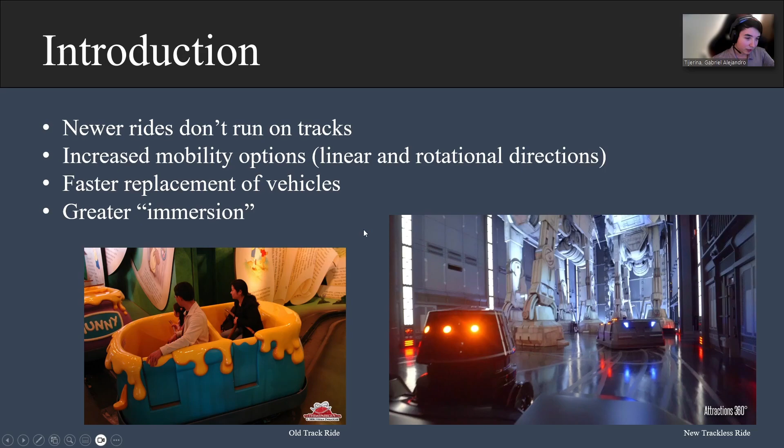On the right side, here's a new trackless ride. Cleanup is a lot easier. You can't see the physical track, so you kind of don't know exactly where you're going to go. Sure, there's tire marks, but they can go in and clean it at the end of every day, or every few hours actually. So on the bottom right, that's one of the newer Disney rides.

Have that same picture again because let's go ahead and analyze it. Flat floor, better for cleaning up, like I said. There's no railings or padding on the walls. Obviously, if there's a track, the vehicle isn't going to go off the track. But here, there needs to be some sort of really good control system so that it doesn't just go ramming into the nice decorations.

Oh, can I turn on my laser pointer?

Yeah, there we go. You don't want to run into any of this stuff because I'm sure they don't have big decorations like this just lying around as backups. Also, this kind of structure is very awkwardly shaped, so they're probably not using some sort of basic photo sensor because of all these jagged corners that would make the vehicle very jittery. So how are they doing that in such a tight space?

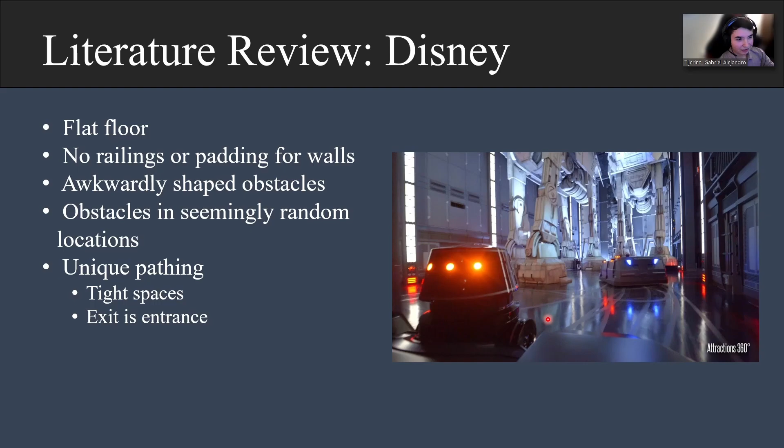And also in this picture, it's actually a screenshot from a video. There's actually no exit to this room. The exit is the same as the entrance. So that brings up more questions over how exactly this vehicle is built. So assumptions have to be made. I mean, as Disney, they're not just going to spoil all of their secrets.

So I've decided to assume that these vehicles use a holonomic drive chassis. You see a picture of it here on the left. That just means that there are four omni wheels, pointed inwards at 45-degree angles. This allows this vehicle to move in any direction, forward, left, right, any 360-degree direction, while also being able to rotate about its center, about its origin. So I started my research there.

Most of the research for this type of chassis ended up being in code, because I've never seen any other vehicle carrying passengers with this type of drive base. But as you can see here, it's mostly used for robots. So there's been a lot of code to power these four motors. That's where the majority of my answers were really.

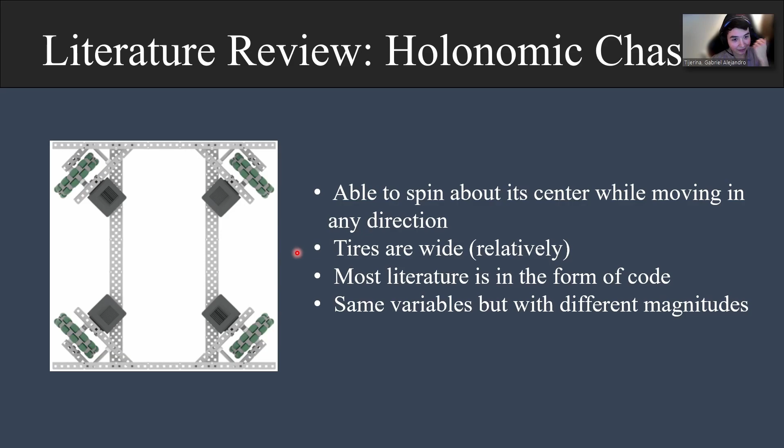At first I wanted to see how I could control a DC motor. So boom, I just looked it up. I found these equations. That's nice and all, but taking a further look at them, I'm trying to control motors that are attached to a vehicle. What parameters do I really want to control? The velocity or the position or acceleration? Looking at these equations, it has nothing to do with a vehicle. It's just for DC motors.

So do I want to have four separate control systems for each motor and then somehow combine all that to make another control system for the vehicle overall? These are the kind of things I had to ask myself from the very beginning. So I decided, I'm still in the research phase.

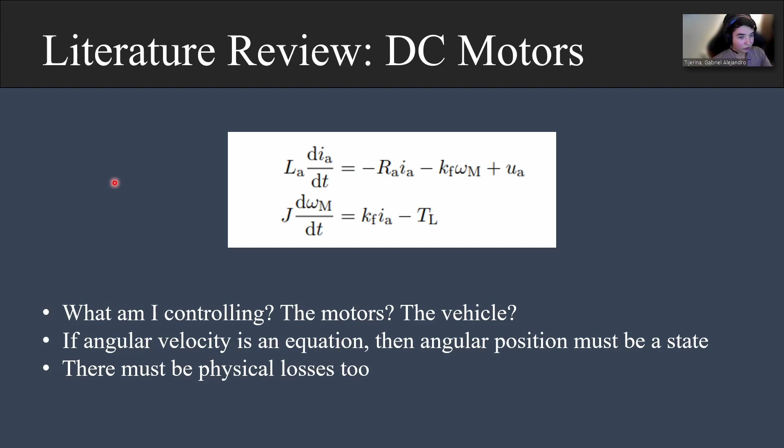Let's look at the dynamics for a car. There's no cars with the holonomic drive, but this gives me a good idea. This is a free body diagram of a car. Just very obvious forces driving the car. And then there's also resistance like wind.

Wind is pretty negligible. These Disney trackless ride vehicles are not outdoors. There's no wind. It's AC, but that's negligible. And they're not even traveling at very fast speeds. They have to travel very slow. They don't have doors. I guess you could just step right out, but you might get kicked out of the park, which no one wants.

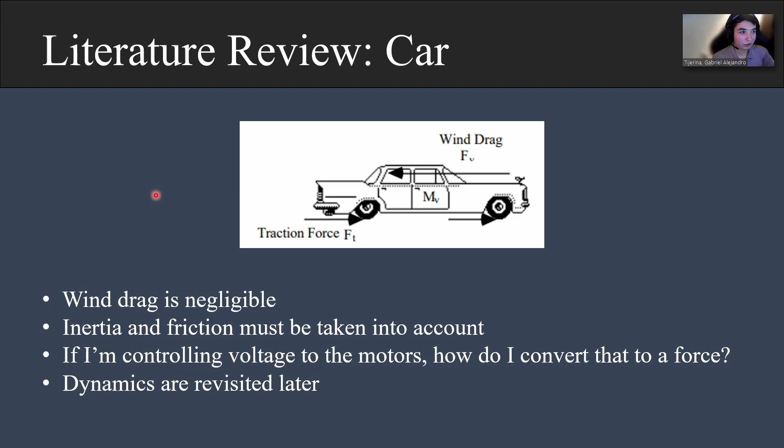So wind is negligible, but this did bring up other forces to keep in mind, like friction and inertia for sure, because on these rides, it's like a thrill ride. You're constantly being shoved left and right. So here we go. I just started coming up with something.

The code for the holonomic chassis wasn't super useful. So on the right here, you can see this geometry, trigonometry work that I did to derive these 4 equations. It's the angular velocity of each wheel. FL stands for front left, then back left, front right, back right, that kind of thing. Here's the velocity of the vehicle, this linear velocity.

The radius of a wheel times the cosine of 45 degrees plus the heading angle of the vehicle. But it's not really heading angle. It's the angle in the global coordinate system. So no matter which way the vehicle is facing, right? And then I have to convert that from degrees to radians.

So these equations may be right, but from here I got stuck again because I still wasn't quite sure what am I controlling and how am I controlling it. Basically, I knew that I had to come up with dynamics. Proper dynamics equations are differential equations, right?

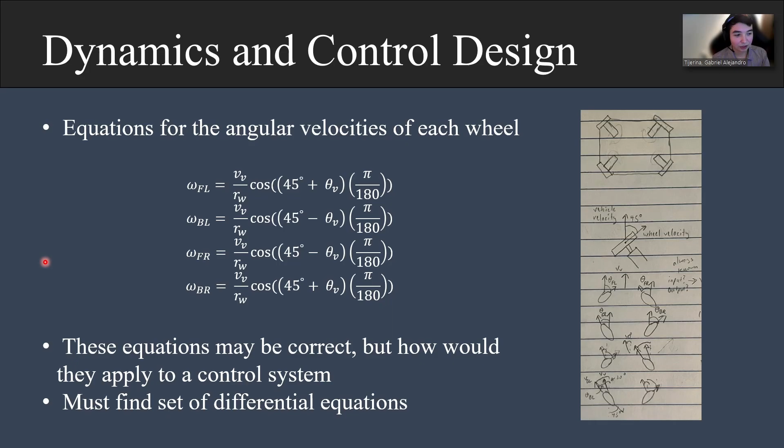So I came up with these 2 equations, velocity of the vehicle in the x direction and the velocity of the vehicle in the y direction. These are the components. And I also included the terms on the right there. That's for friction or inertia, anything. B is just basically the coefficient of friction. Include the losses. Yep. Okay.

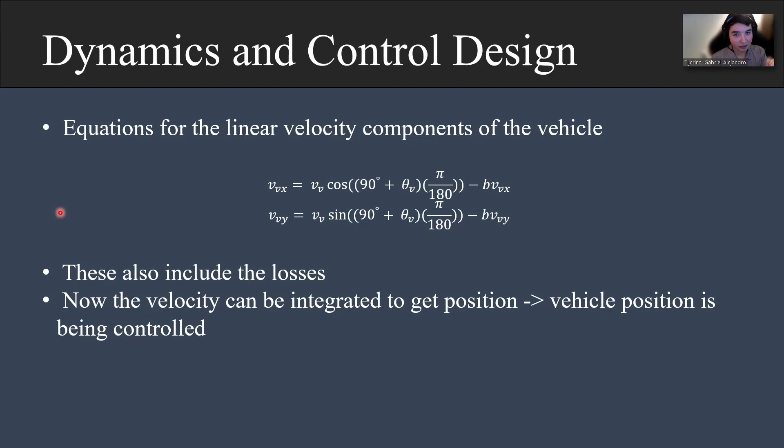There's 2 scenarios that I wanted to simulate. One is a vehicle traveling in a straight line. I thought this would be easier. And the second one was the vehicle traveling in a circular path. Turns out these are the exact same block diagrams. The only thing that's changing is the input.

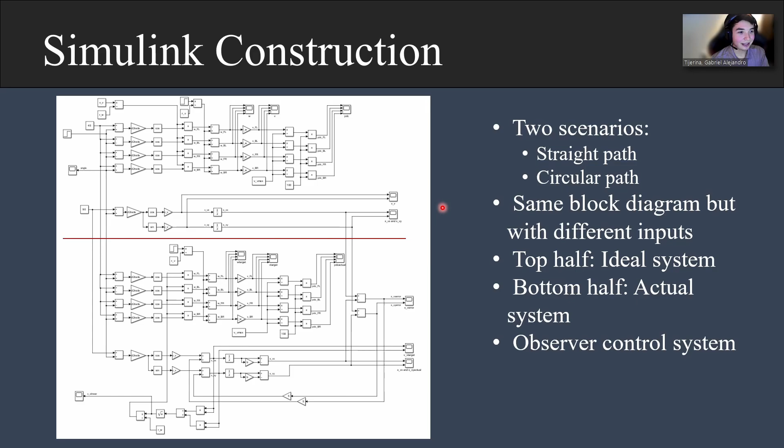Here, this is the top half. This is the ideal section. The 4 equations for the velocities are seen in this red box. From before, it's just the input angle plus 45 degrees. Convert those degrees to radians. Take the cosine of that and then multiply that by, it's not technically in the red box, the velocity of the vehicle divided by the radius of a wheel, not the radius of the vehicle. So that equals the angular velocity of each of the 4 wheels.

Now in this red box, we have the spin parameter. It's simply being added to the angular velocity of the wheels. It turns out that if you want to spin, say counterclockwise, you just add the same angular velocity to each wheel. And if you wanted to spin clockwise, then it's the same angular velocity subtracted from each wheel. And the equations will work it out.

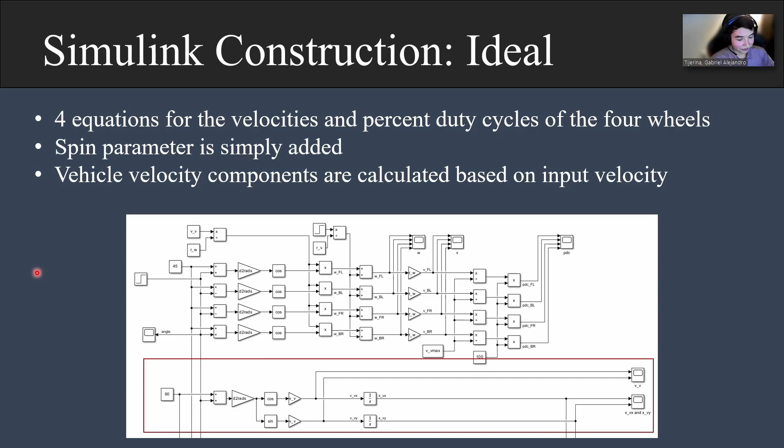Here in this red box are the last 2 equations that I showed, the velocity of the vehicle in the x direction and the velocity of the vehicle in the y direction. Nothing fancy going on here, but that's where the actual system comes into play. So here is part of the actual system. It was too big, but the 4 angular velocity equations are the exact same thing. So I kind of cut those off.

All that's important is the velocity of the vehicle in the x and y directions. So you can see the velocities in the x direction and the y direction. They're integrated. That gives a position. Of course, the other term is added or subtracted on. And then the error of the positions is calculated from the ideal position of the vehicle. And then that is used as feedback to adjust the velocity of the vehicle in the X and Y directions.

And from there, that new adjusted velocity in the X direction and the Y direction, they're put back together, just Pythagorean theorem. And that gives the total linear velocity of the vehicle. It's a lot of words. And then that new calculated velocity of the vehicle is used to calculate the new angular velocity of all the wheels, then the linear velocity of all the wheels, and then the percent duty cycle. So the percent duty cycle is really the useful information that's being outputted. It's not the only output, but that's the thing that's actually controlling the vehicle, right? So you need to know that.

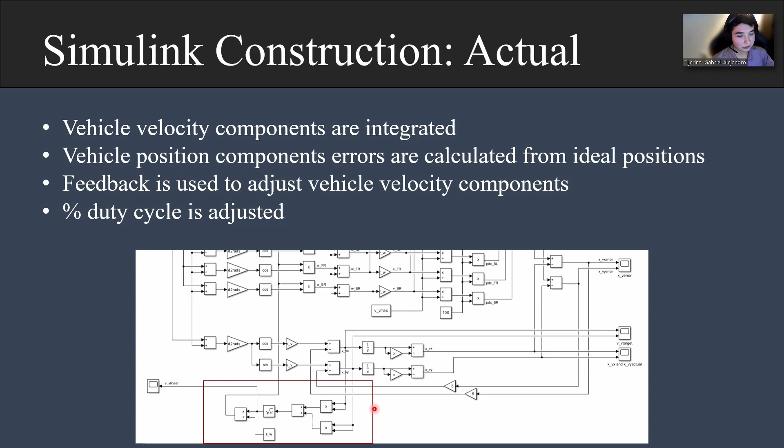I just have the red box showing that's where the error is being calculated, and then that's where the linear velocity is being calculated from the X and Y components. So that was my Simulink construction.

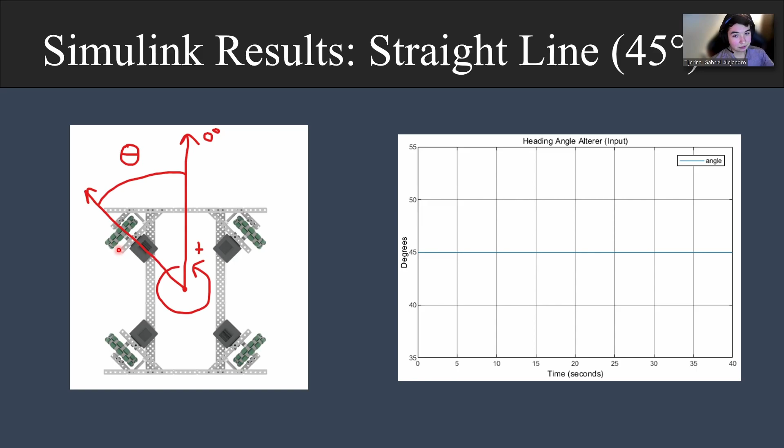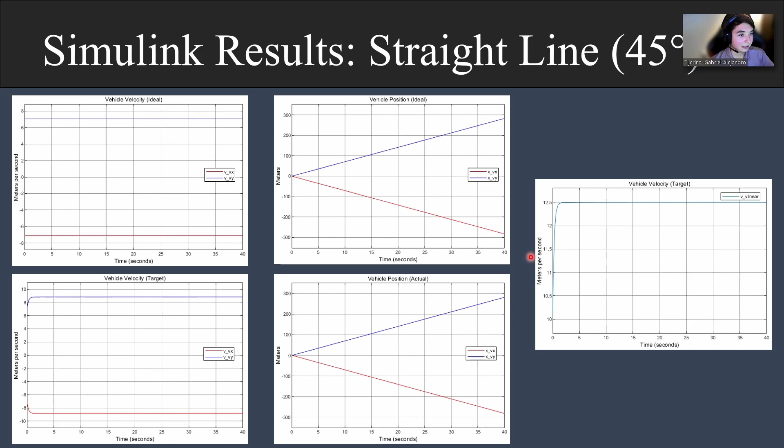And then the right, you don't really need to know that. I just threw that in there. It starts at 10, but the linear velocity of the vehicle actually jumps up to 12.5 from earlier. That's what it thinks, that's its target, but of course we know it's not actually moving at that speed.

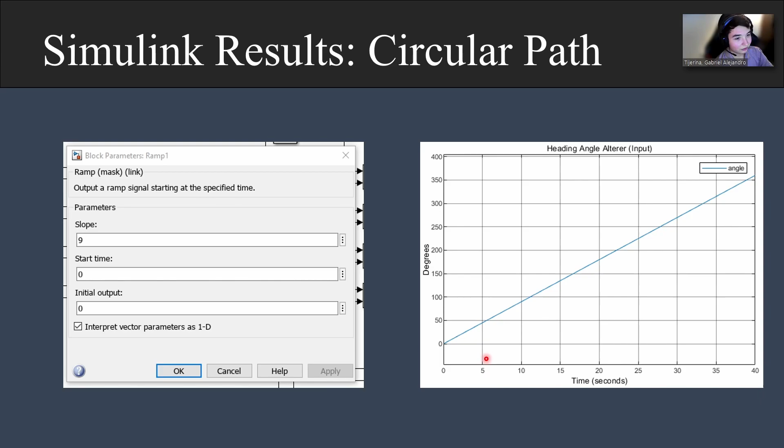Okay, here's the second simulation. This is the circular path. The only thing that changed here is instead of a step function, it's a ramp function. So the slope is 9. That's because 9 times 5, that's 45. So at 5 seconds, the input angle is 45 degrees. And at 10 seconds, it's 90 degrees. So it's easy readability that way.

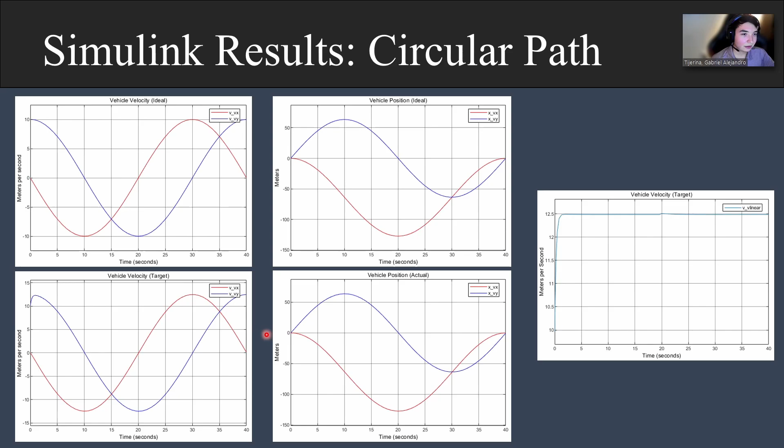And then again, I have the ideal vehicle velocity in the X and Y direction, and then the target. Once again, there's a slight weird bit at the beginning, and it's calculating. It's adjusting itself. And then the 2 vehicle position plots, they're exactly the same because the control system worked.

So lessons learned. I'm kind of smart. I viewed this project as kind of a hard homework assignment. I wanted to come up with everything. I wanted to figure out everything. That's why the literature review kind of lacked, or it was a little bit short. It wasn't very in-depth because I wanted to try and do everything all by myself. And I did, I think.

Well, I did do all of this by myself. Even if it wasn't super fancy, I didn't want to just copy off of some PhD students or some company out there. I don't want to just copy their work. Whatever I did, I did it entirely myself. And I'm kind of happy with that.

The other things are more technical things, like in terms of control systems. It's a lot easier to solve control systems when it's presented, when the dynamics are given to me and the states are given to me. I didn't really have to think about what anything means. I just had to do the math, right? You can do math without knowing what any of the variables mean.

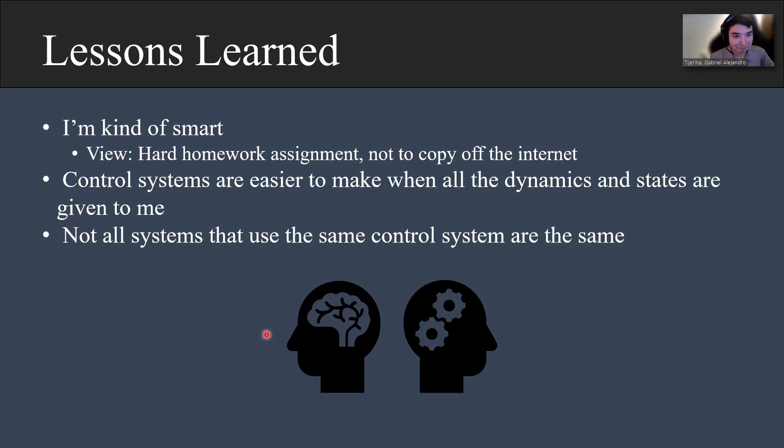So, in conclusion, I made an observer control system for one of Disney's autonomous trackless ride vehicles. I ended up controlling the position of the vehicle and using that feedback to adjust the velocity of the vehicle. And it worked out. So, thank you.